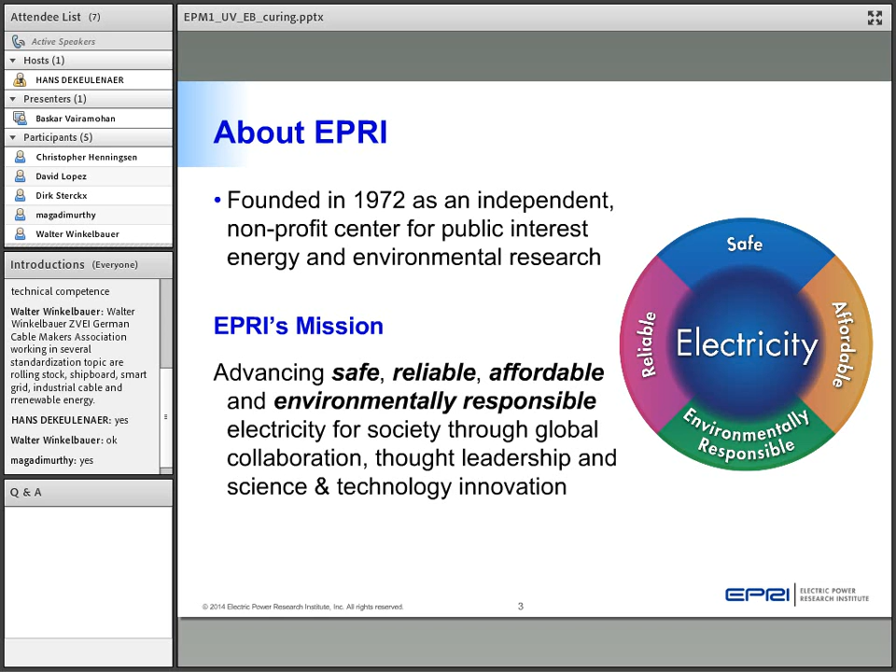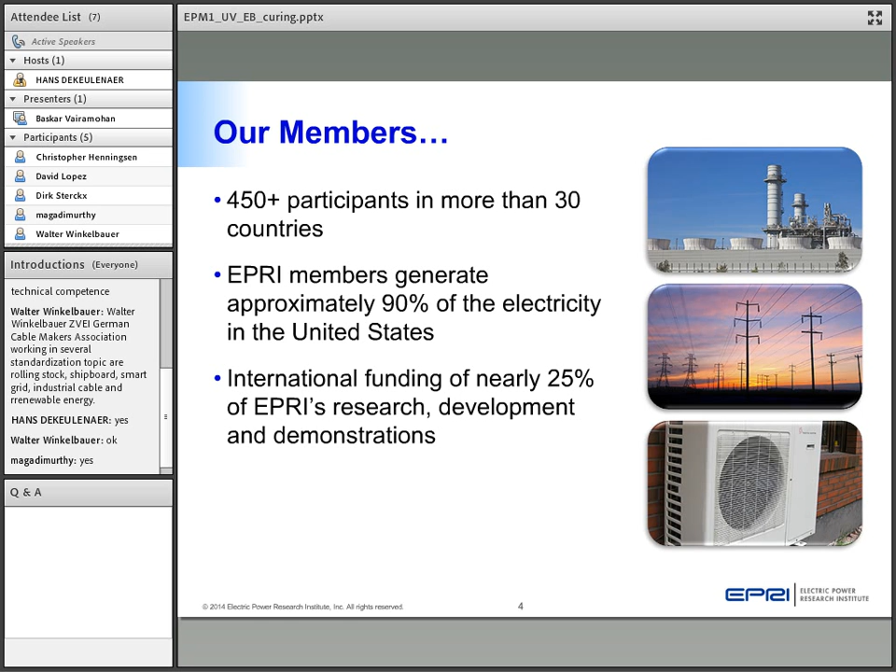We have members spanning across 30 countries, nearly 450 plus utility members, and we have a significant international membership as well. Nearly 25% of EPRI's research and development funding comes through international members.

There are three key aspects of EPRI if you think about it. One is independent, which is unbiased, objective, scientific testing of different technologies, addressing reliability, efficiency, health, safety, and environmental aspects of the electric generation, distribution, transmission, and end use.

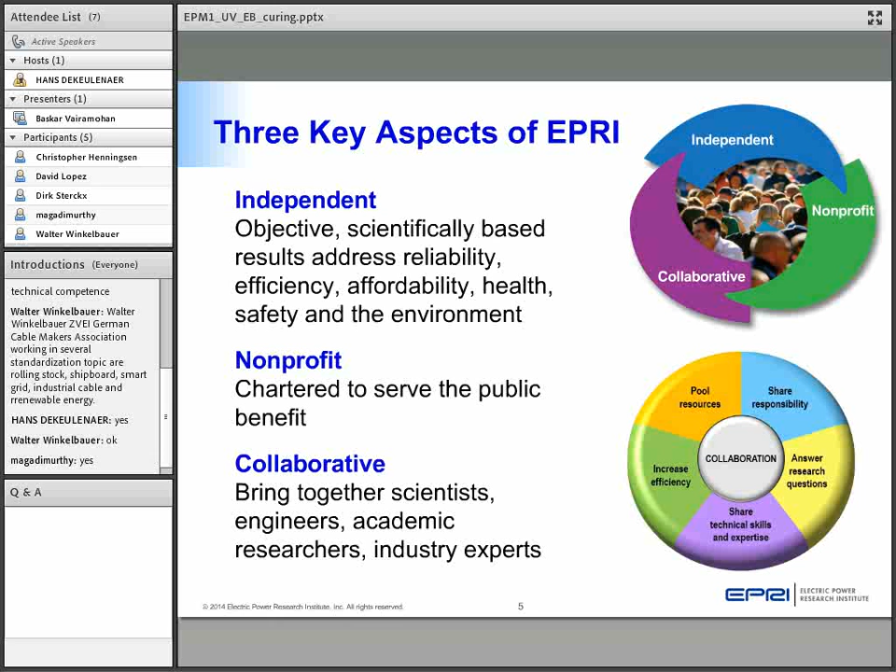The second one is non-profit. We are chartered to serve the public benefit. And the third one, which is also very exciting, is the collaborative effort, bringing together scientists, engineers, academic researchers, and industrial experts together. This engagement that we are having today, and the ability for me to come and share some of our work in this area, can be considered a collaborative effort where our knowledge is shared with you and you can provide feedback on that. So that kind of collaboration is welcomed by many of our members.

So let's go into the basics of ultraviolet and electron beam curing. This is a very specialized area. Before going to the basics, where do you see ultraviolet and electron beam curing? If you say yes to any of the three things, then you have touched and felt UV curing.

If you have used a DVD or a CD disc, if you have a phone, if you use an automobile or car - if you've used any of this, and if you say yes to any of this, then you have used the product, the byproduct of UV curing. All the cell phones, CDs, DVDs, and numerous other applications are there for ultraviolet and electron beam curing.

So we'll take a little bit of a peek about what it is and how it's applied. Not going too deep into the chemical structure, which could take several hours for me to explain, but rather we will talk on the high level technology overview, just enough to know what it is, and then talk about some of the niche market applications that we are seeing.

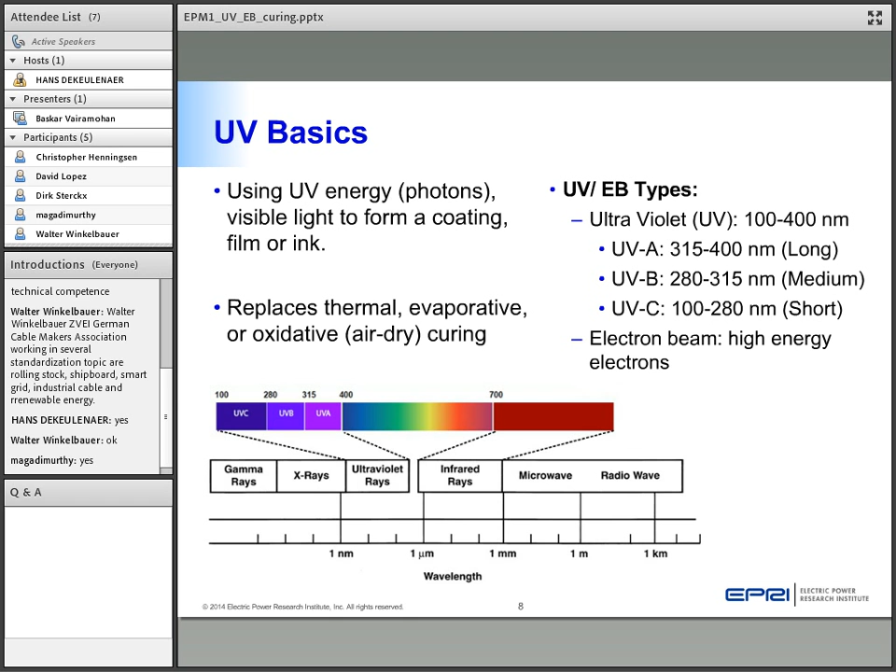In UV curing, the ultraviolet energy in terms of photons, or near visible light, is used to form a coating, a film, or cure and dry an ink product. This UV replaces thermal oxidative evaporative curing that has traditionally been done in the industry. An alternative to UV is also electron beam, which has high energy electrons used to initiate the curing process.

So to give you a more detailed explanation of how this curing process happens, the UV radiation is emitted by and absorbed by valence electrons of atoms in the formula of the coating. When an electron in an outer atomic orbit encounters a photon from the UV light source with the right amount of energy, the electron will absorb that photon and move from its normal state to an excited state.

If the photon has enough energy, then the electron will leave the atom of the formula of the curing component or chemical compound and entirely become a free electron or free radical. This free radical is what helps in the polymerization process of bringing all the components together and making a polymer. We will talk more about it in the next slide with pictures showing how this free radical helps in the polymerization process.

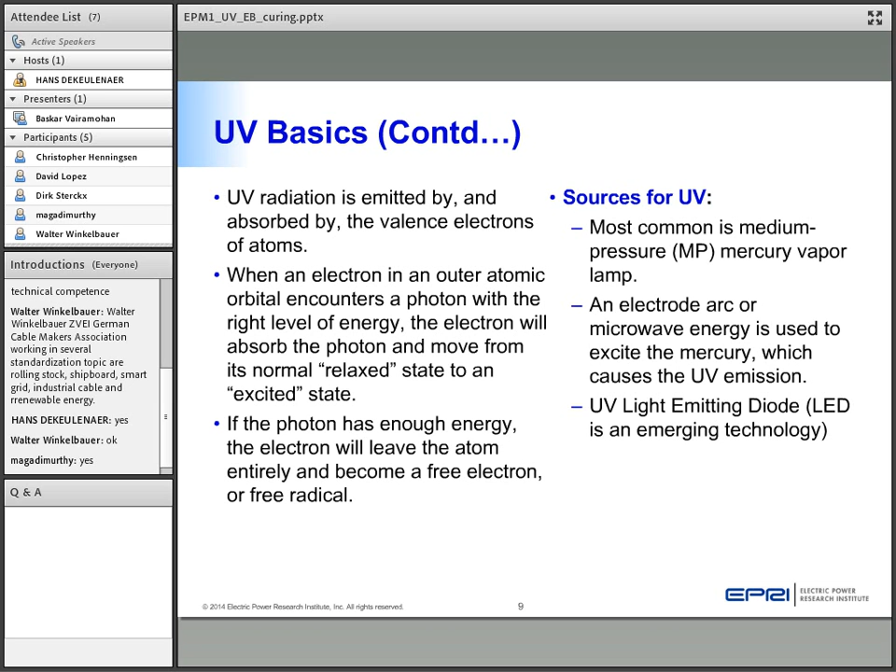The typical source for UV light most commonly is the medium pressure mercury vapor lamp. This is the traditional lamp, but it is currently seeing a different trend. The UV based light emitting diode is a very lucrative option where it has low power and provides the same kind of spectrum for the UV range. Not only that, it has different control schemes that could help in curing a specific location. So the LED gives different options to industrial facilities. Also, electrode arc or microwave energy could be used to cause UV emission. So these are some of the common sources for UV.

So now that we know about UV, what is curing and how do these two come together?

Curing is a set of chemical and physical processes that the coating materials must undergo after drying. The coating must attach itself to the substrate physically or chemically, and must cohere to itself as well. It also needs to undergo a chemical reaction called polymerization. These processes are collectively known as curing. Depending on the chemistry of the material, curing can take place either at room temperature, at elevated temperatures, or by free radical reactions such as ultraviolet or EB.

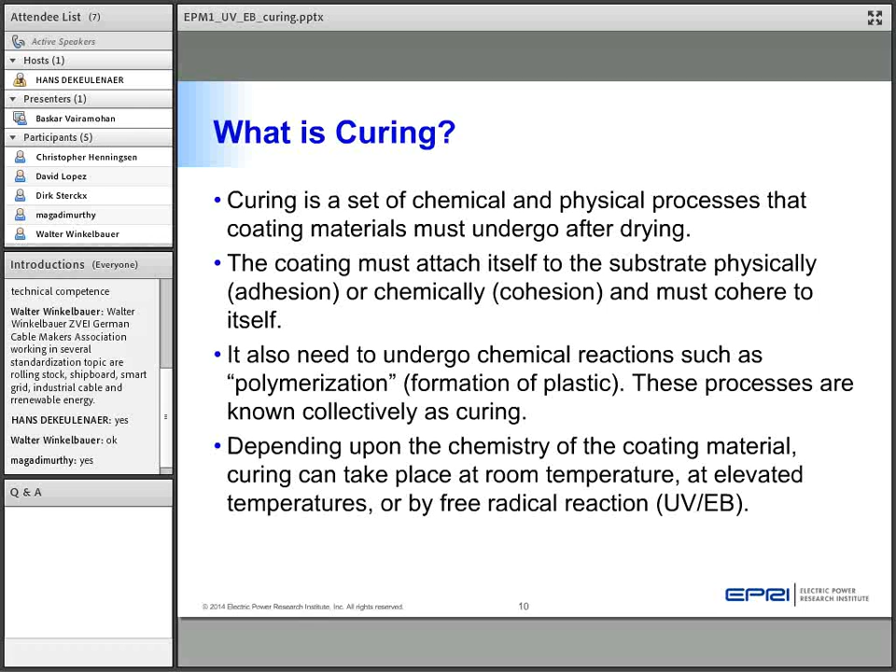Curing by EB, electron beam, or ultraviolet is just one of the ways. Traditionally, the way curing happens, if you have a painting on a car or automobile, and you want to cure it, it has a two-step process.

In the first step, the solvent-based paint is dried first to remove any moisture or solvent. In the second step, the part to be cured goes inside the oven and is thermally cured so that the coating adheres to the surface. Most industrial coatings are thermally cured.

With thermally curable coatings, adding heat can accelerate the curing process, but care has to be taken because sometimes overheating could cause defects on the coating. So going from a thermal to a non-thermal process saves a lot of energy. It's a very energy efficient process.

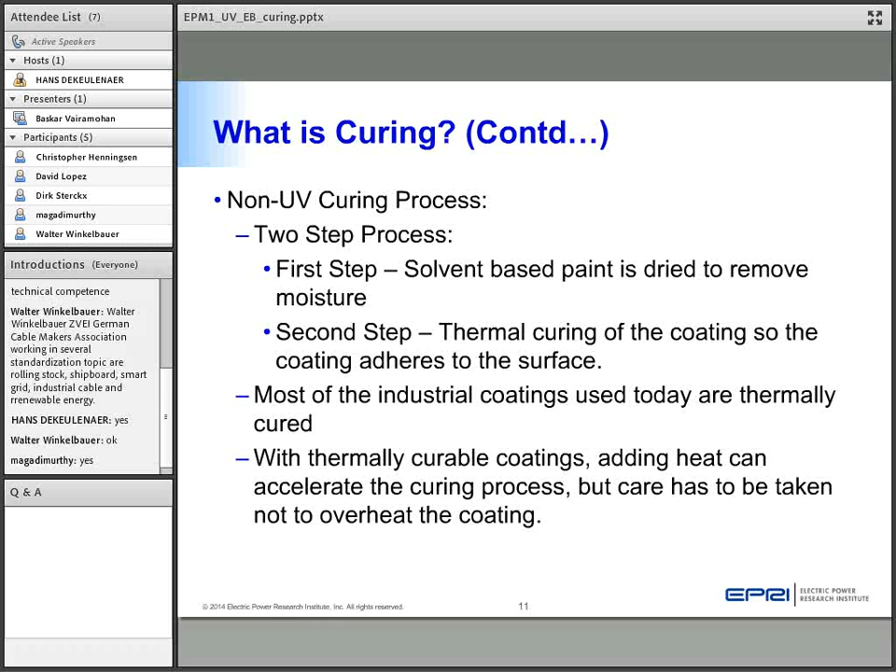What are the basic requirements for UV or EB curing? There are three important elements in determining the requirements of UV or EB curing. First, the application. When I say application, is it a cell phone case that you want to coat with a UV curable coating, or a CD, or a fiber optic cable? Each of them has different requirements, so the application itself determines what kind of energy level and what kind of formulation goes into it.

The second area is the energy source. Would you like to go with ultraviolet based curing or electron beam curing? Even though I say this together, ultraviolet and electron beam both have distinct differences between them. They are not one and the same. Ultraviolet uses ultraviolet light emitters, whereas electron beam provides low energy or high energy electrons. So there are two distinct different technologies, but in this case we are going to treat them as one because they use similar formulations.

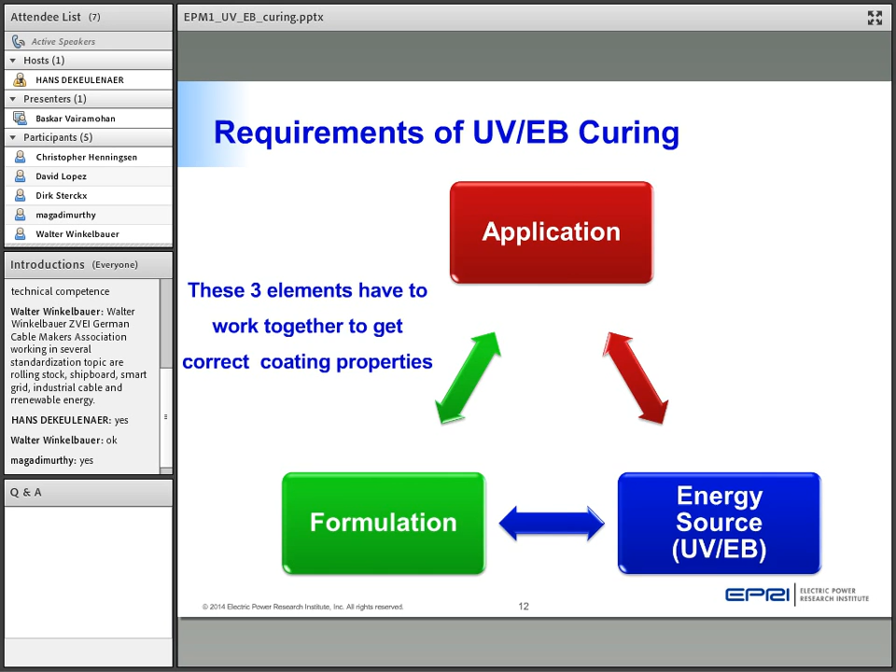And formulating a UV curable coating powder or a compound is also a very involved process. It is not just made of one chemical compound, but rather it is made of four distinct major components. It could be more than four, but these are the main four that go into the UV formulation. The first product is called the oligomer. The oligomer is just a polymer or a polymer intermediate containing few structural units. And I will show in the next few slides how they look.

The monomer is a molecule that may bind chemically to other molecules to form a polymer. So in order for monomers to combine together to form a polymer, there needs to be some reaction and addition. Additives are chemical agents such as color pigments, fillers, and wetting agents that add various properties to the coating, and they call this performance tuning. The additives are very important to impart various properties to the coating.

For example, if you are taking a cell phone case, one of the important specifications is it needs to be scratch resistant. So that kind of scratch resistant property, or color. Nowadays the cell phones come with different colors. So adding different pigments to make a different color product is all done through the additives.

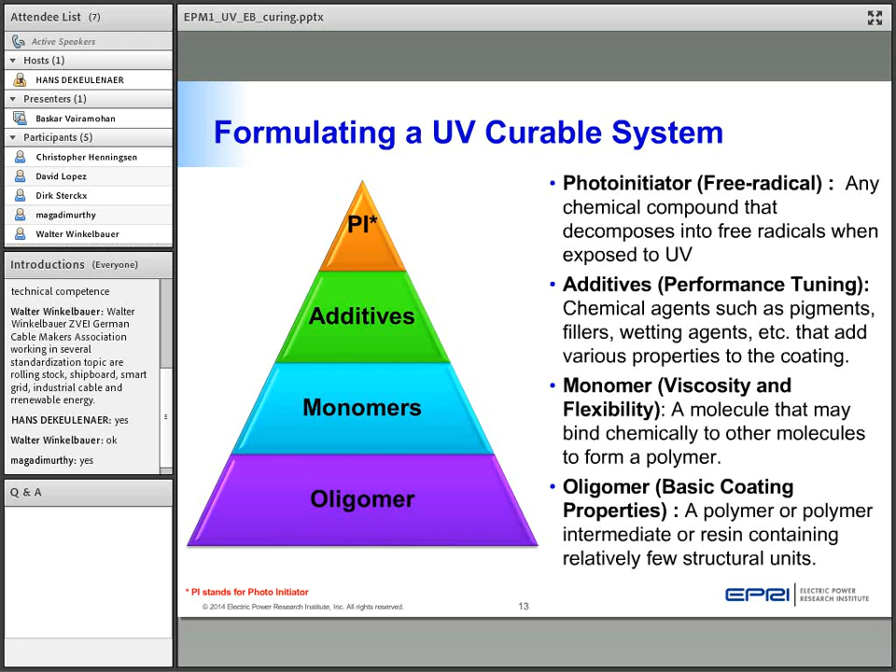The photoinitiators absorb the UV light to form the free radicals, and the free radicals initiate the polymerization process by attaching or adding themselves to the monomers and oligomers. It has to be noted that different photoinitiators absorb UV at different wavelengths. So the peak wavelength is determined by the application and what kind of energy is needed.

And an interesting thing is they have a long shelf life, so they can be stored for a long time, and they have the long shelf life because they only react with UV light at that wavelength. So if you keep it outside, it may not get damaged. So they have a long shelf life.

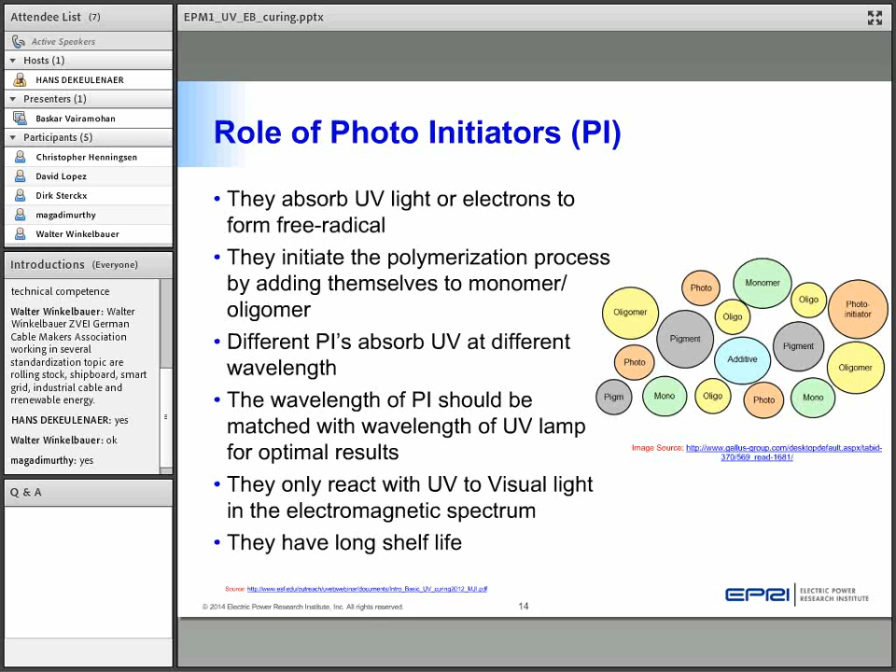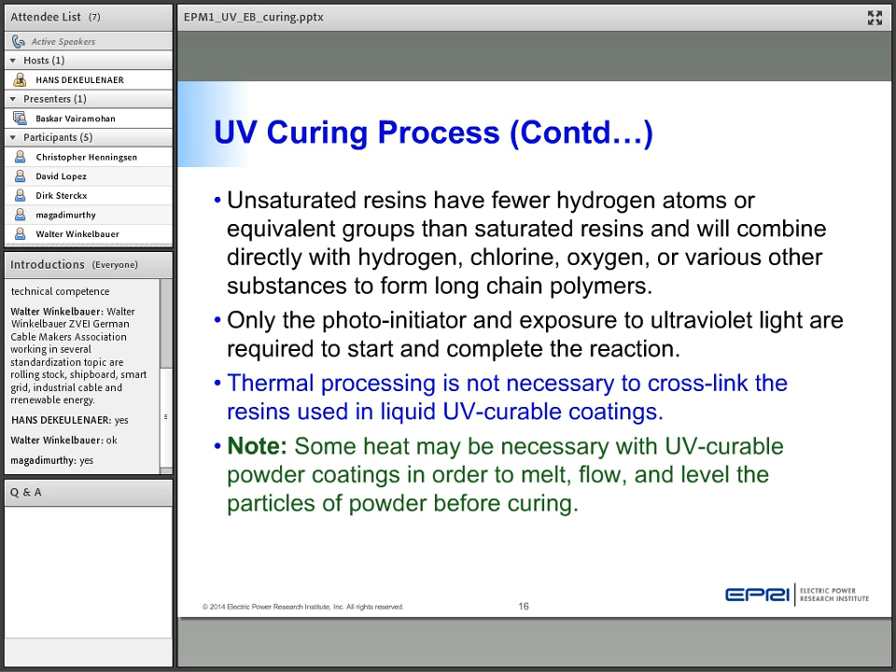Another key point of the curing process is that thermal processing is not necessary to cross-link the resins. Just the exposure of the photoinitiator to the ultraviolet light is needed to start and complete the reaction. There may be some heat needed to make sure that the coatings completely melt and flow for a uniform spread, but it's not the same amount of thermal energy needed by traditional thermal curing. So it is a very green, low energy usage technology.

Let's take a few minutes to talk about electron beam curing and how it is different from ultraviolet curing. In electron beam curing, the formulation is almost identical to the ultraviolet. It still has the oligomers, the monomers, the additives. But one thing that is not there is the photoinitiator. It's because electron beams use electrons, and the electrons are the free radicals that can initiate this cross-linking process to make polymers. The electrons can open up the double bonds and initiate the polymerization, so no photoinitiator is required.

One interesting thing is that electron beam systems can use the UV formulations to get the required properties. Even if there is a photoinitiator there, the electron beam systems can still work with the UV formulation. However, the UV system cannot work with the electron beam formulation because of the absence of photoinitiators. So sometimes electron beam formulations are less expensive than ultraviolet based systems because of the absence of photoinitiators, but the electron beam systems' capital cost could be higher. But overall, for a specific application, they come to be very cost competitive and in fact advantageous over other thermal technologies.

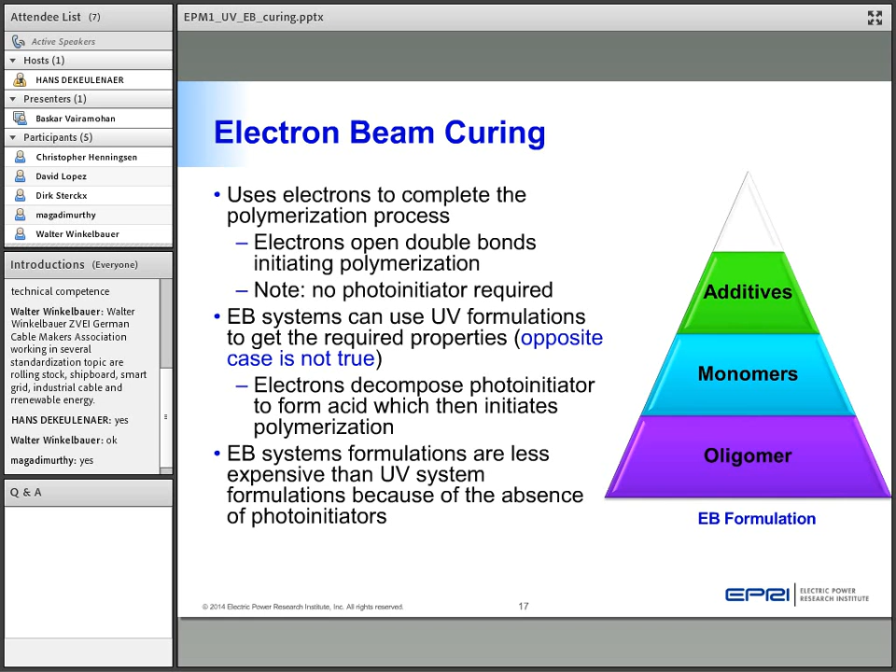So here is a machine that could provide the electron beam. The electron beam has ionizing radiation. They are low energy electrons, with sufficient energy to break the bonding in the coating to generate the free radicals.

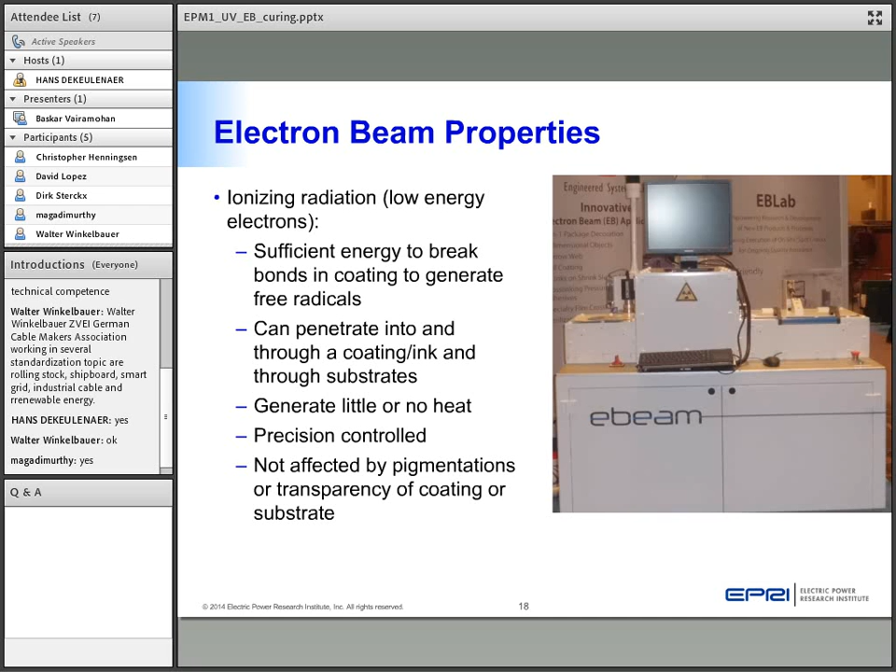It can penetrate through a coating or ink, through the substrate, and it generates little to no heat, which is a very desired property, and it is controlled very precisely. So that's another advantage of electron beam: it is not affected by pigmentation or transparency of coatings or substrate. So because of the electrons involved, there are some advantages.

So when all the coating is completed, the industry has different mechanisms to test how the curing has been completed, how successful it is, and what the metrics are to determine if the coating has been successful or not. So there are three distinct tests that I've pointed out here, but there are a few other tests that I may not have listed. These are some of the most commonly used tests that I've come across.

And the main one is the pencil hardness test. The pencil hardness test is exactly what you have imagined: a sharp pencil trying to go through the coating and make a scratch. And they have very different formulas to calculate how deep the penetration is and what kind of scratch it could cause.

They also have something called the steel wool test, where the steel wool that we use in the kitchen could be used to create a scratch on the surface that was coated and see how much damage or how much scratch this has caused. And these are different tests just to make sure they increase the properties so it's scratch resistant based on different applications.

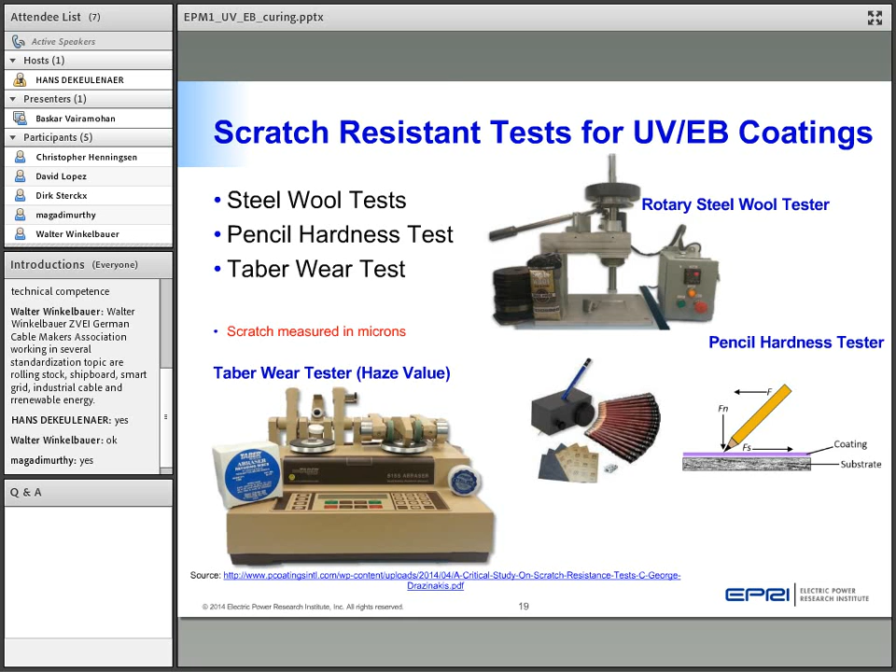So with that, the first section of the operations part was completed. Next, let's take a look at some of the existing applications and some of the emerging applications where UV is becoming a very specialized area. One of the new areas that is getting a lot of attention these days is 3D printing.

3D printing is also known as additive manufacturing. How it is different from traditional manufacturing is that in traditional manufacturing, to make a product, you take a block of metal or a block of wood and remove parts that are not needed using CNC machines, a lathe, or some kind of milling tool. This is in essence subtractive manufacturing. Whereas in additive manufacturing, the part is built one layer at a time, layer by layer.

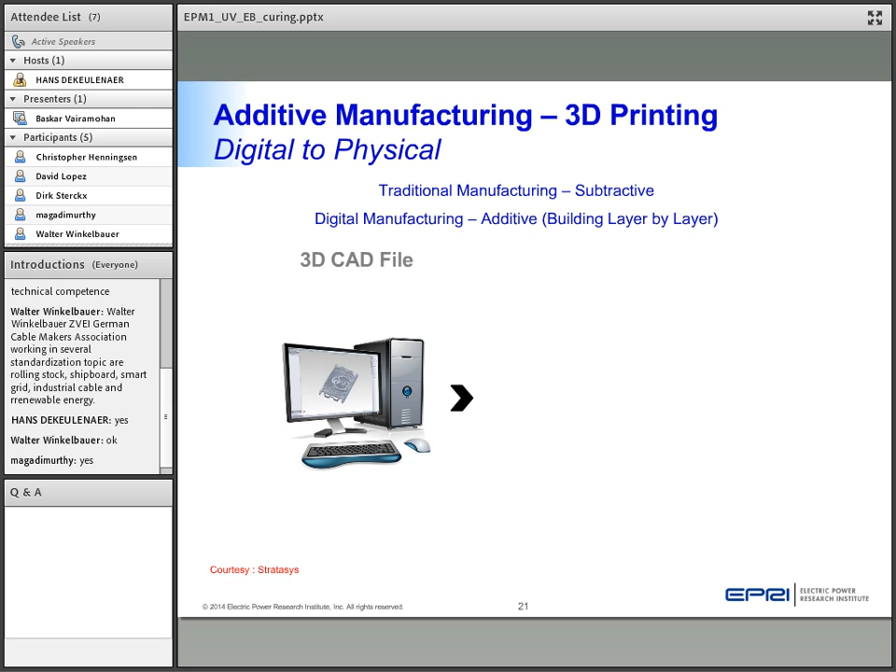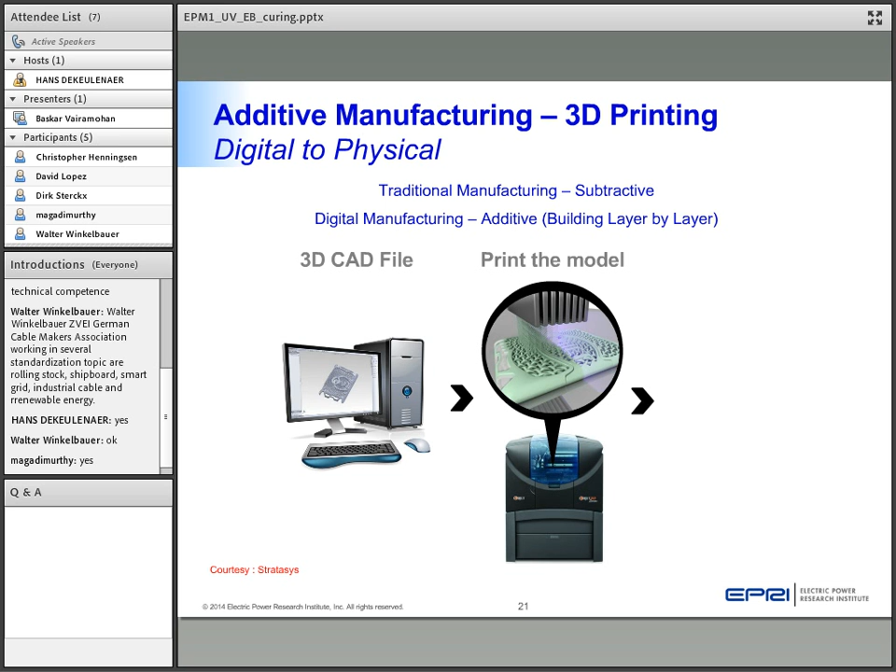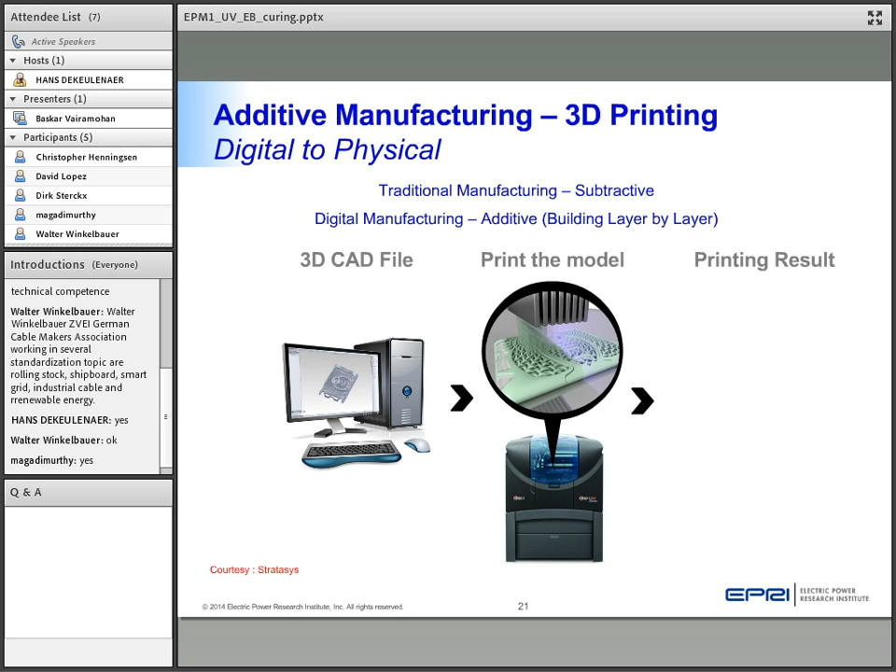First, a 3D CAD file, a computer drawing, is made, and through software this file is transferred to a printer that can understand this file and then start printing it. And like our traditional printers that print ink on paper, these are very specialized printers where there's a build platform, which I'll show in the next slide. The results are printed and you see the final product, and it may go through some post-processing to make sure the specifications of that particular device or product are within the specs.

So here is what a 3D printer, especially for ultraviolet curing, looks like. There is a build tray that moves from top to bottom, and the movement is just one layer deep, and the layer is defined as the thickness of the ink that is used to make that part. So a part is divided into many thousands of layers, and each layer, which is micron-level thick, is built with that ink.

And if you can see on the top, the head has a UV light. When this ink goes through and starts putting the part in the build tray, the UV light, which can cure the paint or the coating in just a fraction of a second, can form the layer one at a time. Every time the head moves back and forth and deposits the material, the UV light cures it. So you can see the part slowly starting to build, and when it is finally done, the build tray is down below and the part is on the build tray.

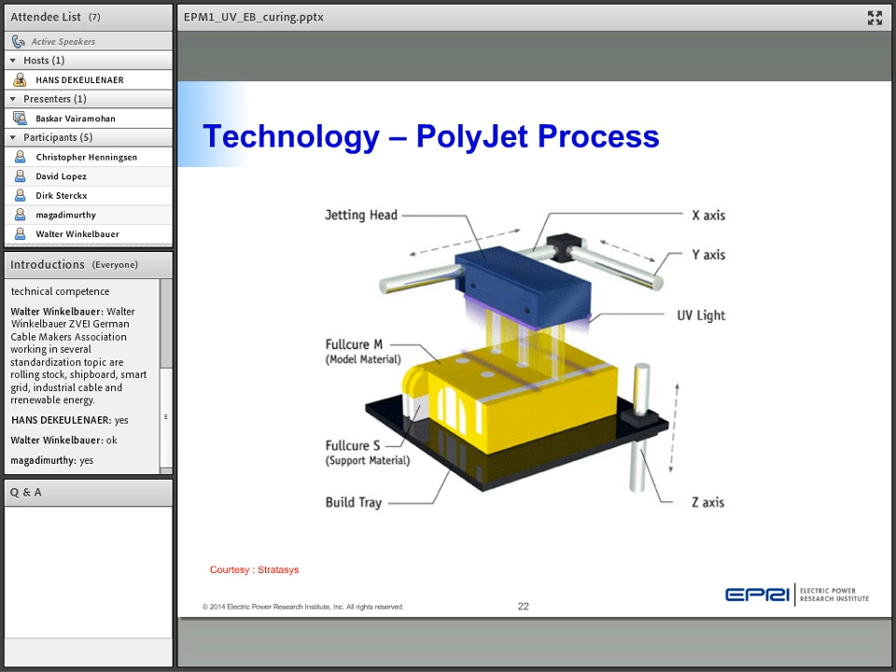There are different ways of doing 3D printing, but one of the advantages of UV-based 3D printing is that, like our color printer, you can add different colors and print the parts in multicolor. So that is one of the advantages of ultraviolet-based 3D printing.

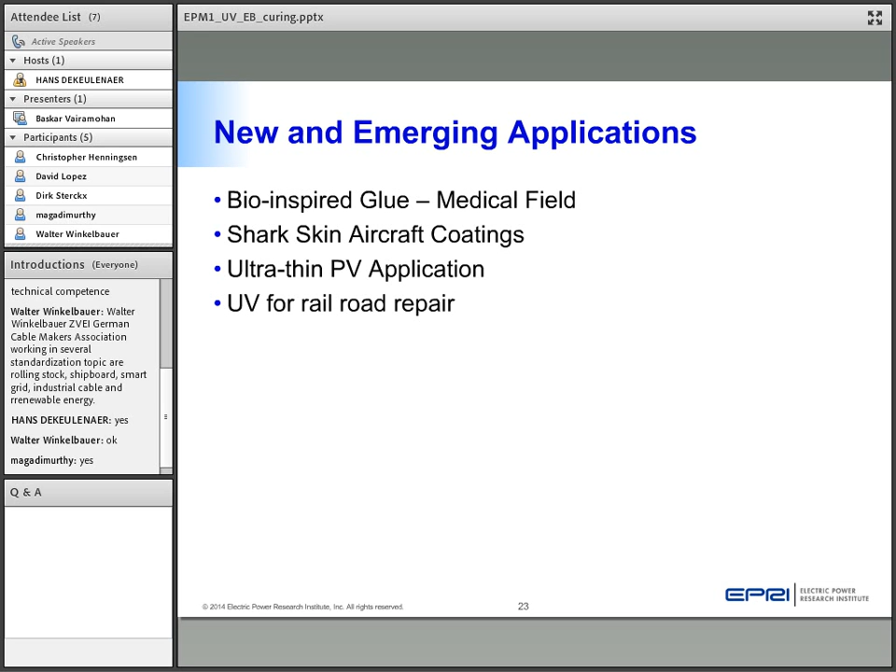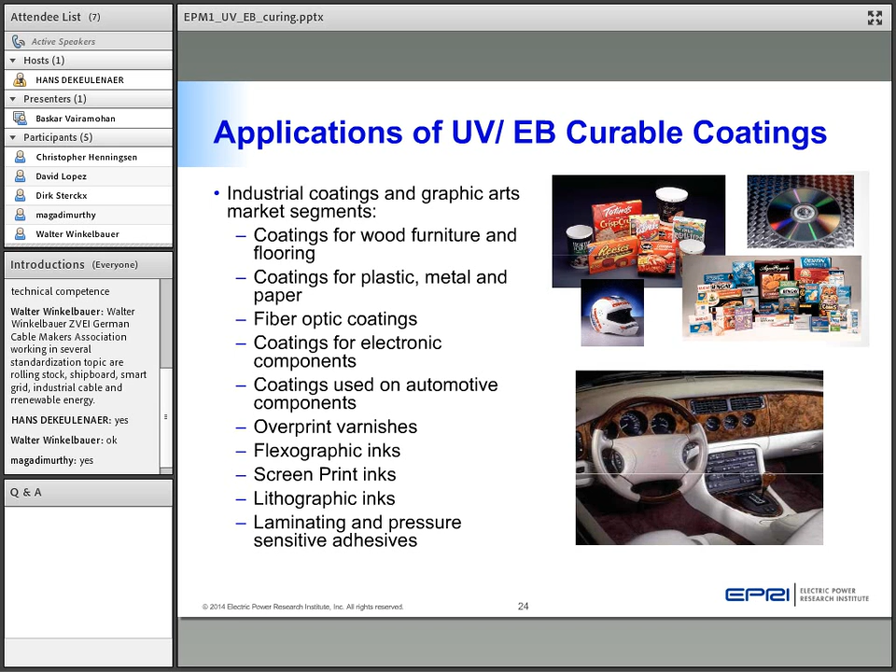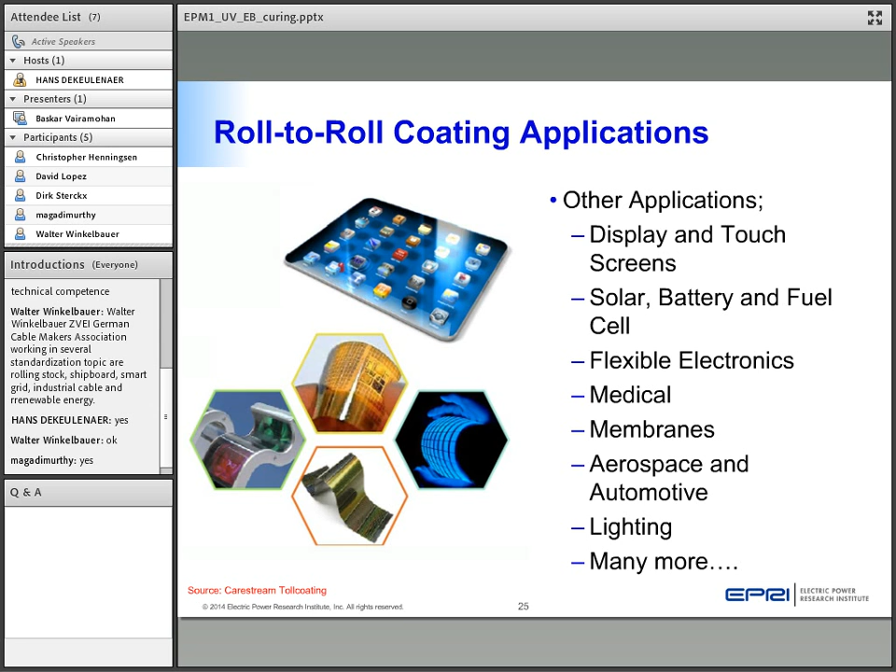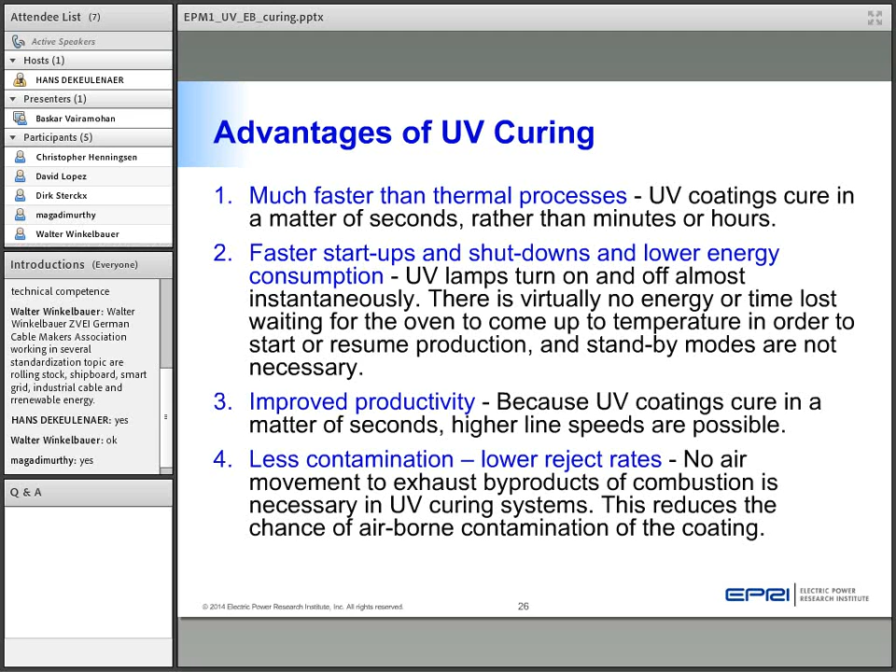Reduces or eliminates volatile organic compounds and solid waste disposal. This is a major problem in many industrial segments because environmental codes and regulations restrict volatile organic compounds coming out of a paint booth, because solvent-based paint uses a lot of volatile organic compounds, and when they dry and go up, they have to be burned so they don't go to the atmosphere, which could cause pollution and environmental safety hazards.

So there are places called non-attainment areas, and for places like that, UV technology could be a great fit because most times they do not contain solvents, and VOC emissions are very minimal, if not none.

So this is a very good green technology that could be used in the field. Less space required due to the speed of the cure. The systems require less floor space. In the following slides, I have some pictures that show how compact they could be. They offer superior finishes and also less thermal noise and air pollution.

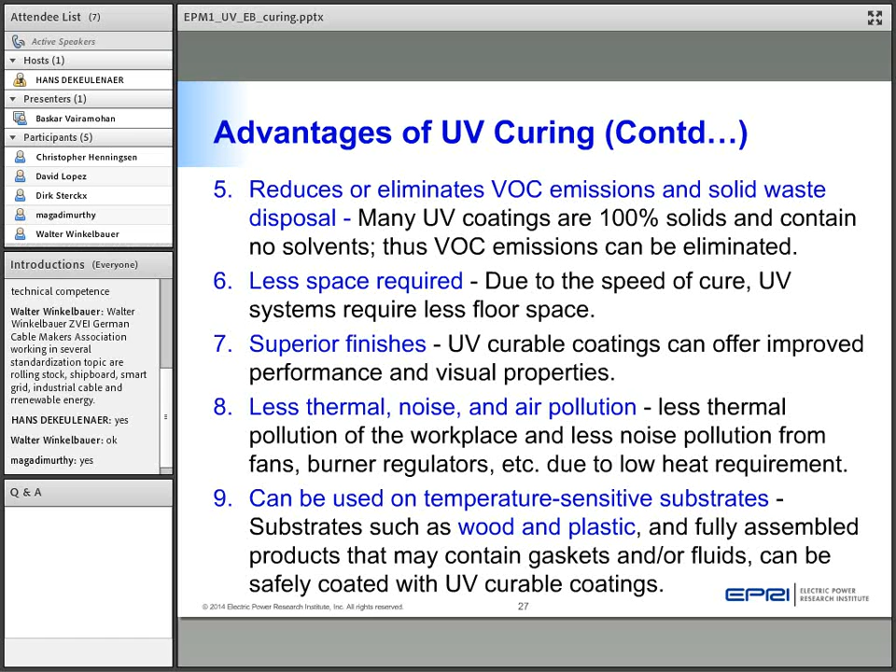There is no thermal process that could degrade the quality of the wine, and at the same time you are increasing the line speed and you are eliminating the packaging waste. So there are so many distinct advantages of using UV curing.

So what are some of the reasons why it is not widely adopted? This is still a specialized industry. The capital cost is still high for retrofitting. For a greenfield application it may work well, but for an existing brownfield application where you're trying to replace the existing natural gas or other thermal based curing with ultraviolet curing, the chemistry and everything is changing, so it may bring some additional cost, and without some incentives the industrial customers may not go for it.

However, even though the EB systems' capital cost is expensive, they have a very good competitive advantage over other applications, but still the first cost is a hindrance to adoption. Second, the inks and coatings could also be expensive per pound because of the use of photoinitiators and other components. Retraining of operators is another area causing some concerns, because UV and EB inks or coatings perform differently compared to conventional inks and coatings.

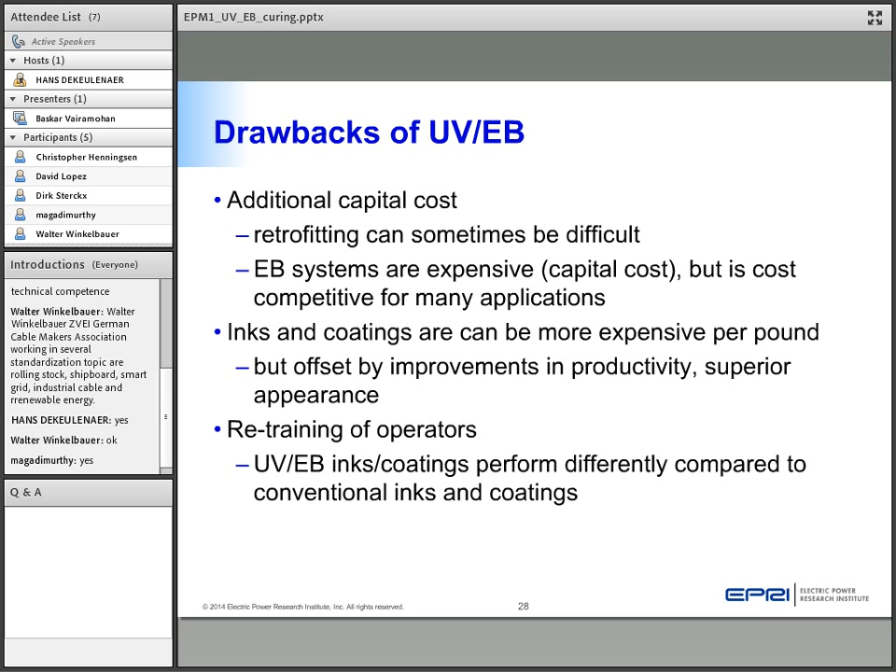So these are some of the reasons why it is not widely adopted. However, in areas where it is used, they have shown extremely beneficial and superior results compared to other traditional ways. So in the next few minutes, let's look at how this industry is looking in terms of growth and what is the current status of the industry.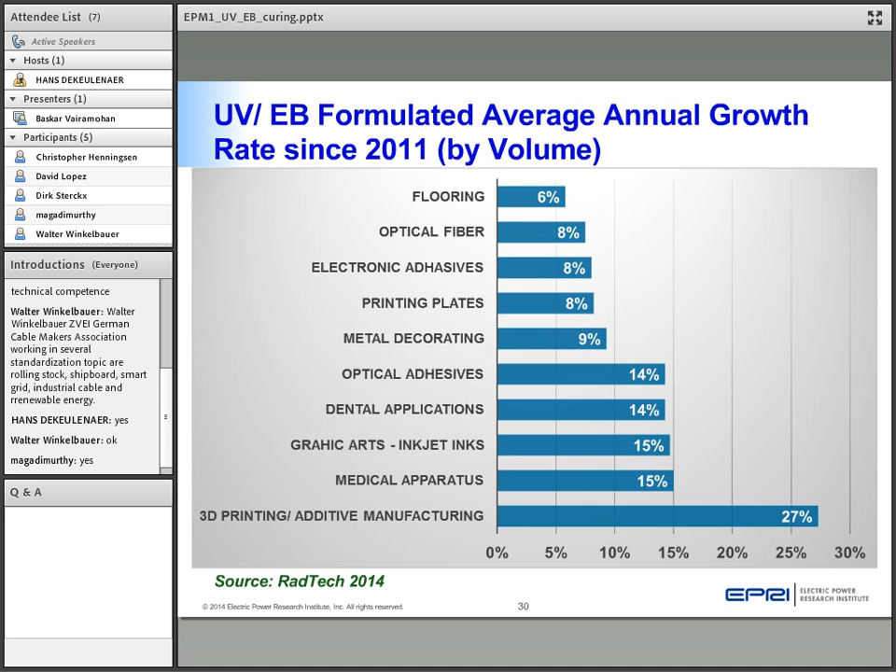And if you look at the worldwide raw materials used for UV and EB curing and the split, nearly one half of all the formulations are monomer components. The monomers are one of the key components of the formulas. Oligomers are about 40%. The rest is divided between the photoinitiators and the pigments and additives.

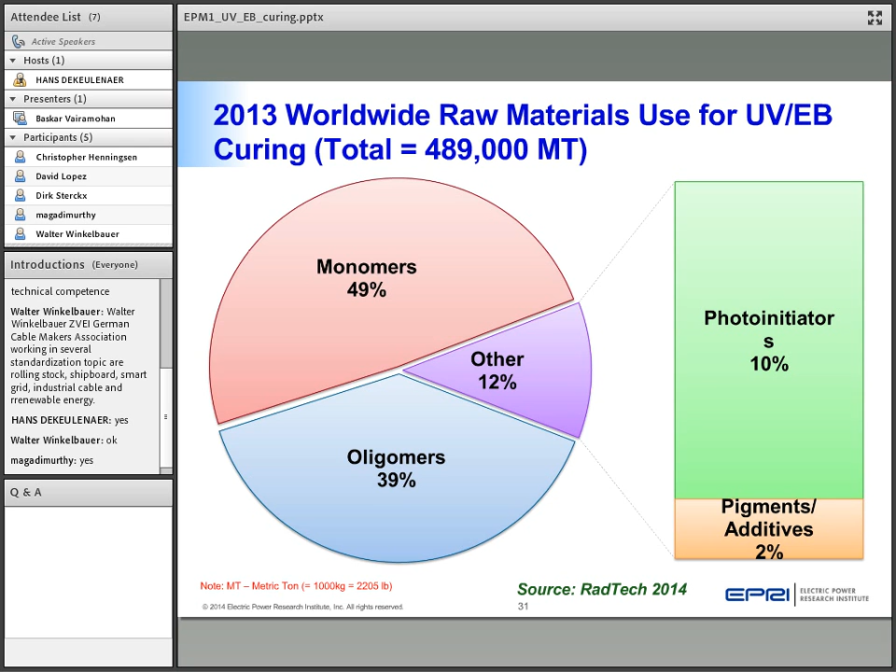And what are some of the applications that we are seeing worldwide and also in Europe? The worldwide raw materials use is about 489,000 metric tons. In Europe, it is about 150,000 metric tons. So a significant share of the world market is Europe. Worldwide, you see industrial coatings accounting for nearly 44%, which is the single largest application. You also see lacquers, electronics, printing inks, and others.

In Europe, one of the key areas is wood coatings, which accounts for nearly 38%. Then there are plastic coatings, PVC flooring, metal coatings, and also lacquers, printing inks, and electronics. So this is kind of the trend or the current state of the market, and the spread across different applications.

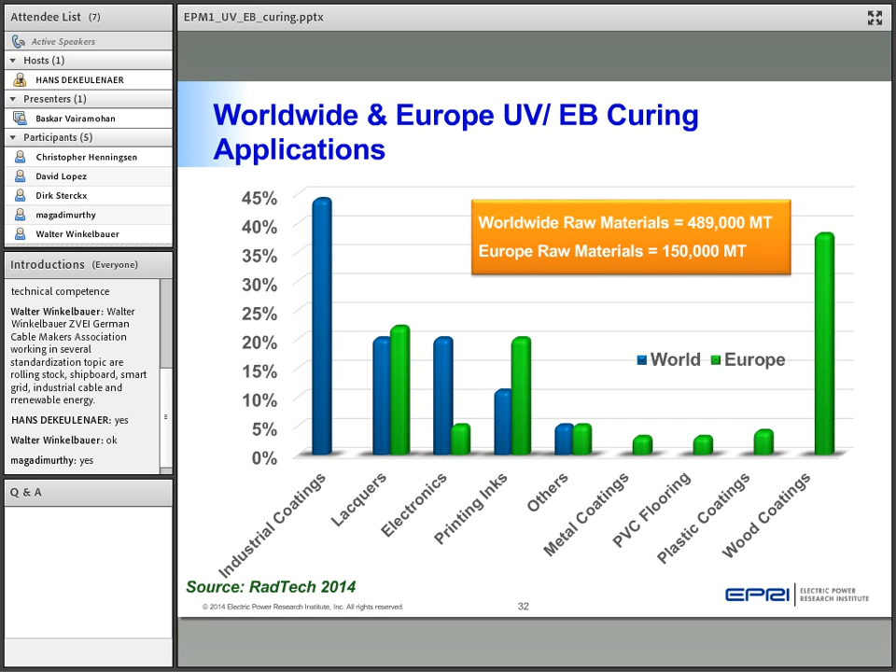Some of the trends that we are seeing in the UV lamp technology is the LED market. LED based UV curing is on the rise, and currently it's around 10 to 15% of the market share is LED lamps, but it's projected in 2023 it's expected to grow up to 35% of the market share in terms of the cost. $269 million in sales is projected for 2023. And this is based on the cost.

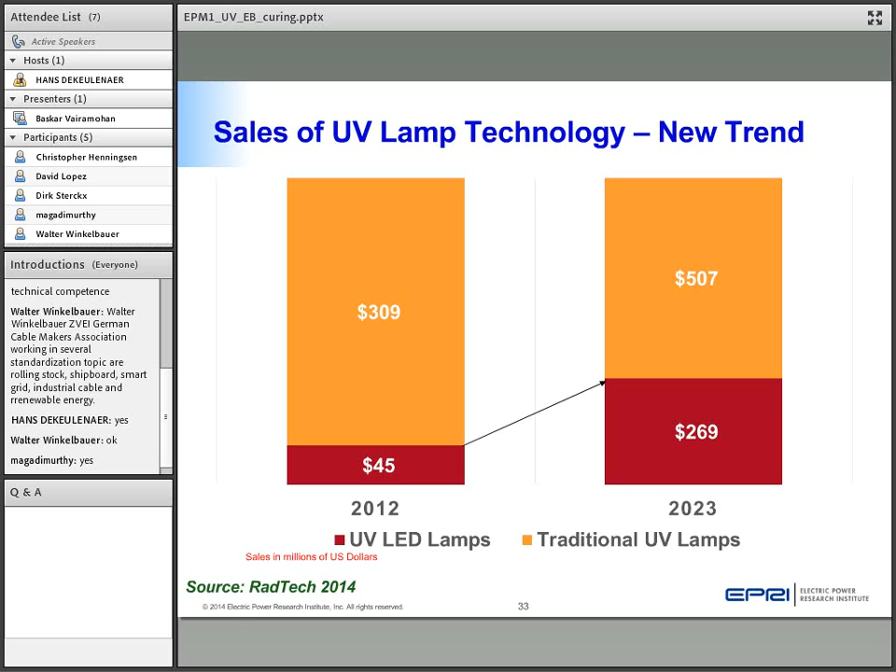But as the LEDs get better and better and the cost keeps coming down, for the same amount of money, a lot more LED lamps will be used than the mercury vapor lamp or other medium pressure lamps. So those are some of the trends that we are seeing, and here are some additional markets for UV application based on the old SIC codes. Now it's called NAICS code in US, which stands for North American Industrial Classification System. But this is just to show what are the end use applications that we see in the current market.

So that brings us to the completion of our presentation, and maybe I'll take just 2 minutes to go through some of the key highlights of a conference that I participated in this year on this technology called RadTech 2014, and want to show you some of the new product lines and new areas that are coming up, and also included some vendor contacts, emails, and addresses that you can follow up in case you want to get additional information.

So RadTech is a non-profit trade organization that has more than 700 members. If you go to radtech.org, they provide very detailed information on various market projections and key trends. And they have reports that address a lot of the growing areas, growth opportunities. That's the organizing agency that did the conference, and we had more than 100 plus vendors show up in this conference. So what I've listed here is just the equipment vendors, the ultraviolet equipment vendors as well as the electron beam equipment vendors who came to the trade show, and these are some of the vendors that you can go to their website for additional information.

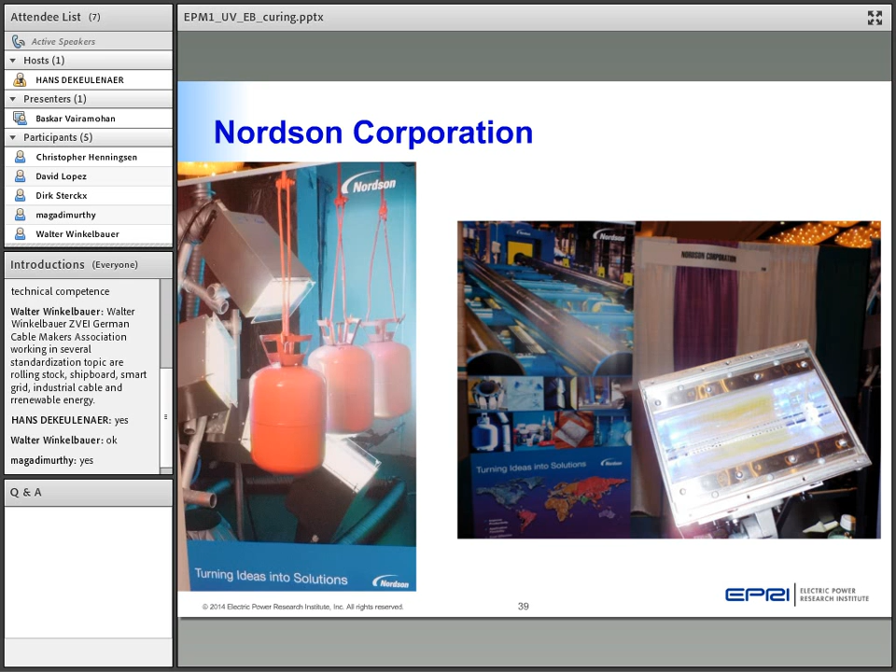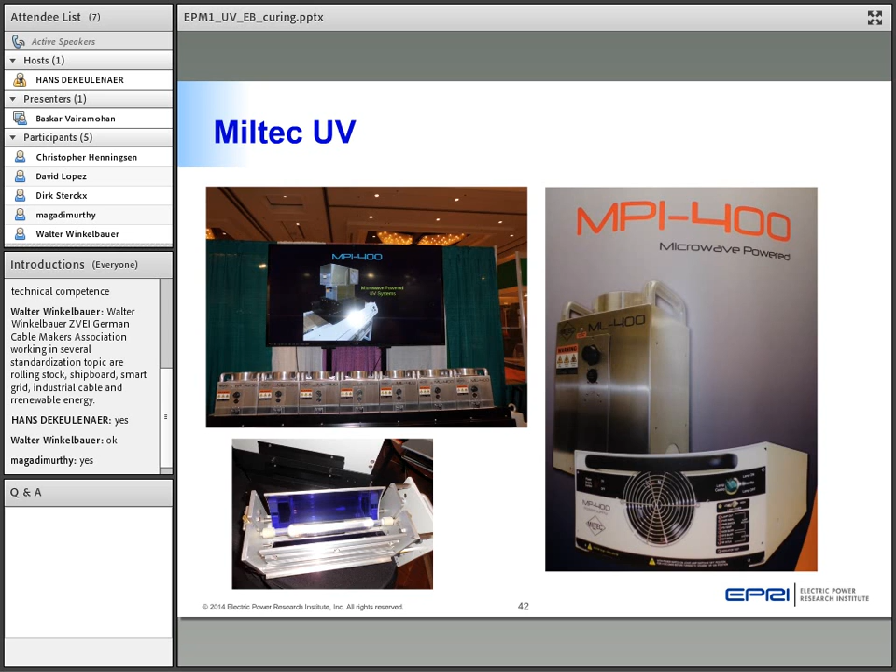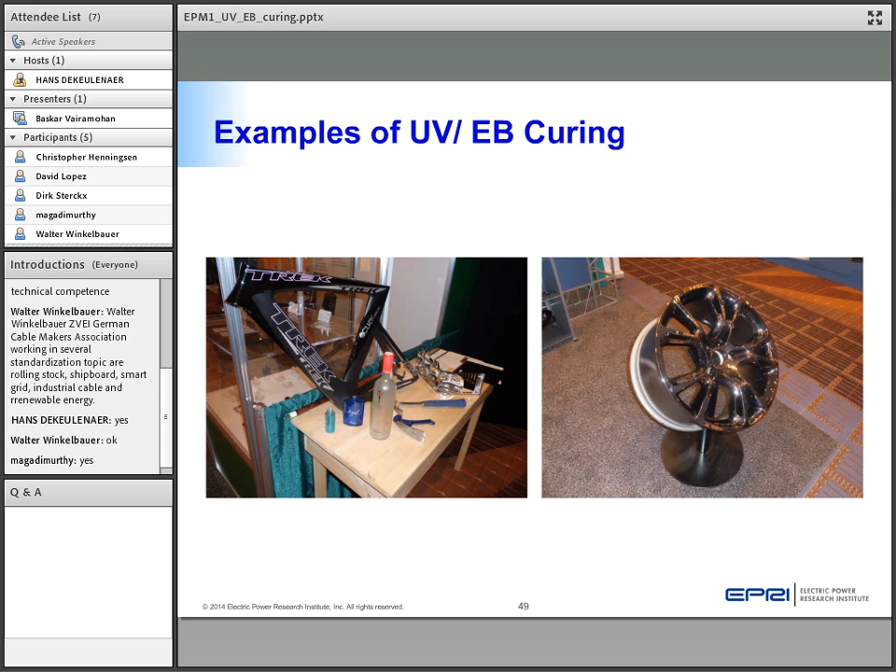So these are a few other resources if you want to get more information on these documents. There could be many more, but these are some that could help you gain some understanding of UV and EB curing.

So with that, I would like to see if you have any questions.